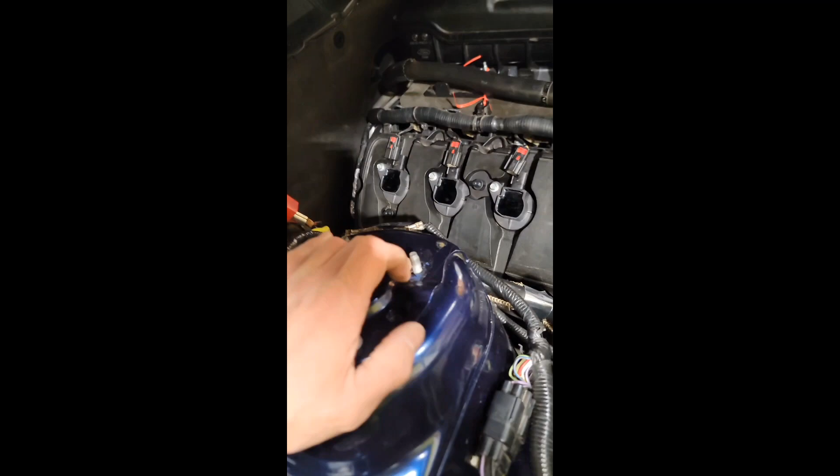So first of all, I am not sure if it is the valve cover gasket even. I know it's coming from this side of the valve cover. I already cleaned up all the oil and stuff, so there's no point in even trying to show you. But what I did find is that I figured I would test the torque on all the bolts for the valve cover, and none of them were torqued down to spec.

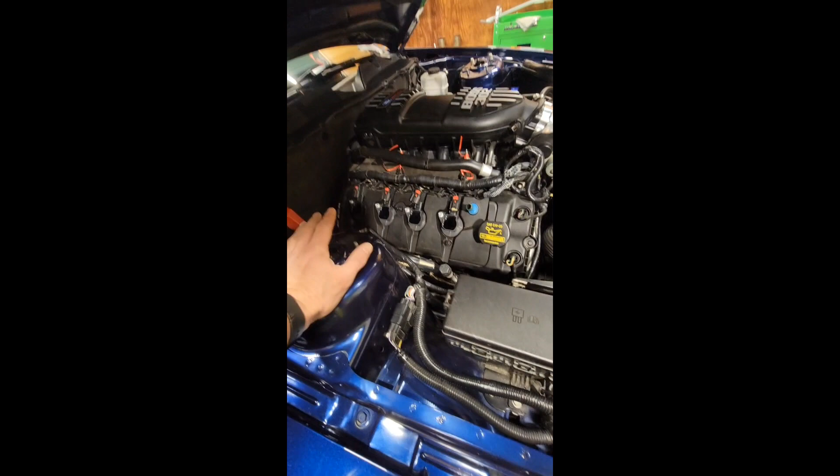There was a couple up here. There was like this one, and I think this one was tight enough, but the rest were pretty loose. So I don't know if over time they had come loose. I heard other people talk about that too. So I figured I would just make this video before I start tearing into it and mention that all the bolts were loose and I had to tighten them. And it was coming from back here too.

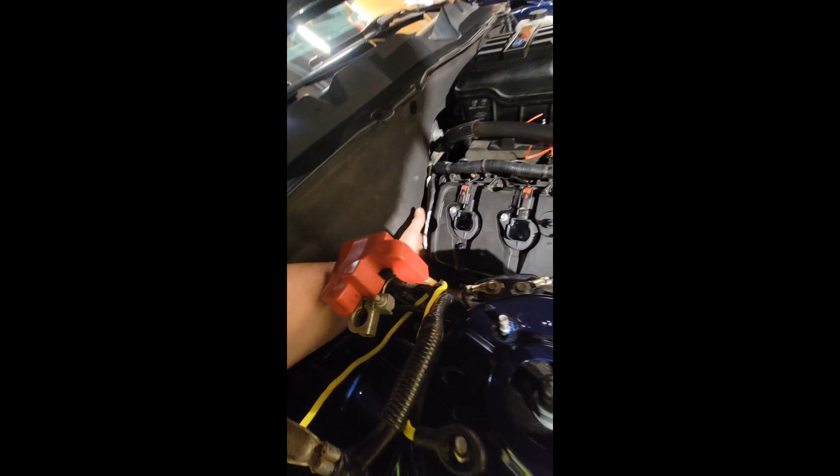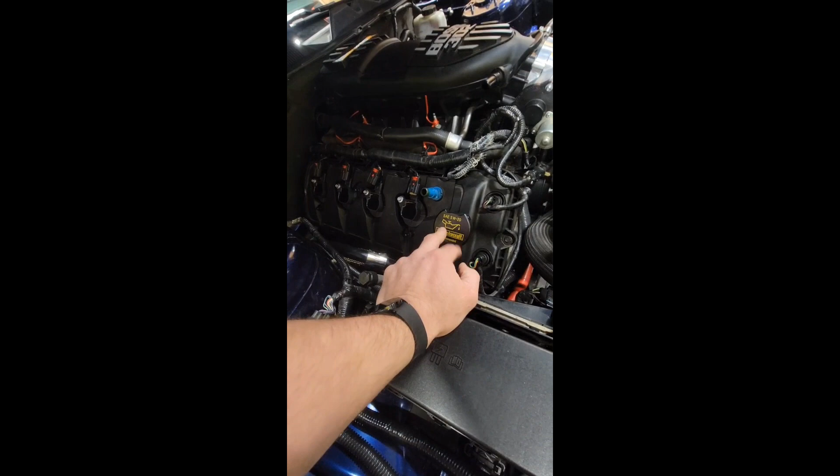So I don't know if anybody else is going through that, but I'm pretty sure that it's happening on my car because I have a catch can, but I took my cats off the other day, and I think I need to get a one-way breather for the oil cap, because I do have a supercharger kit that I'm going to be putting on here. It's a Roush Stage 2.

So I was kind of looking into that already, and what they were describing was that when your exhaust starts to backfire, it puts a lot of pressure back into the motor. So I get a shitload of backfires with my catless X pipe. So anyway, I figured I'd show you what's going on.

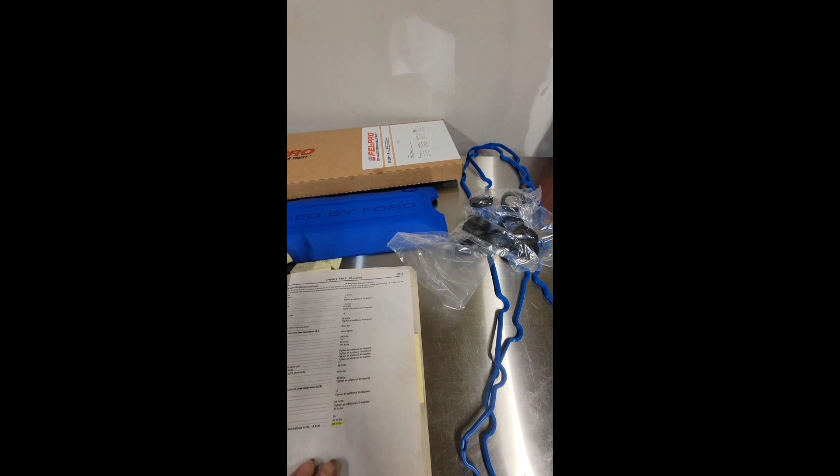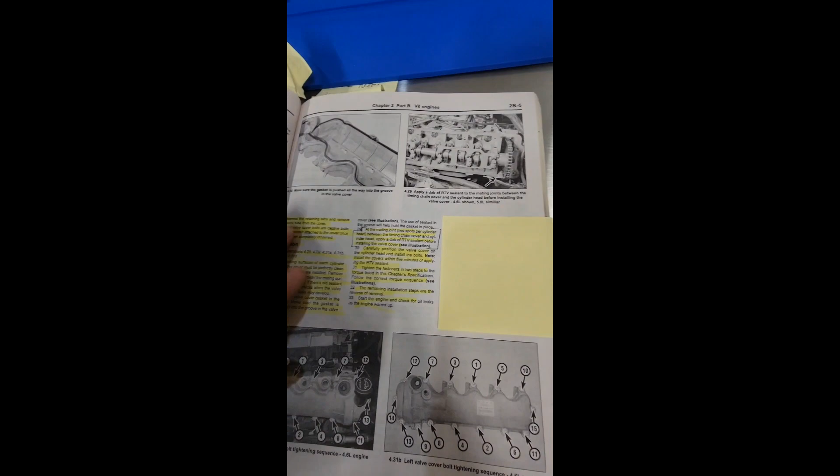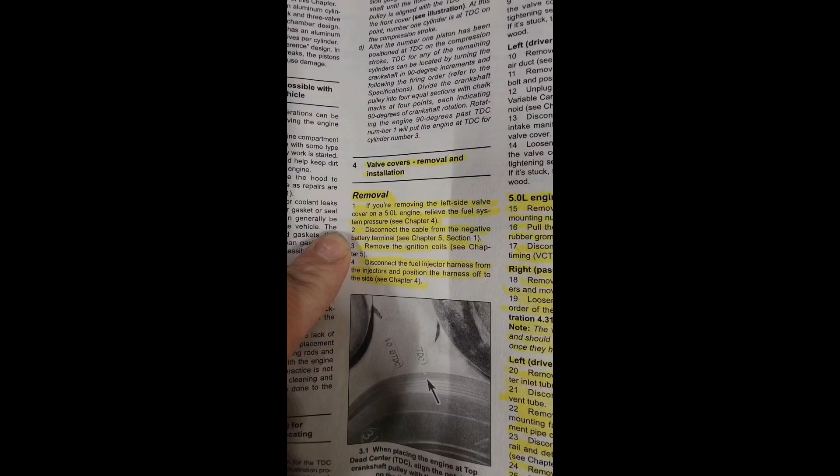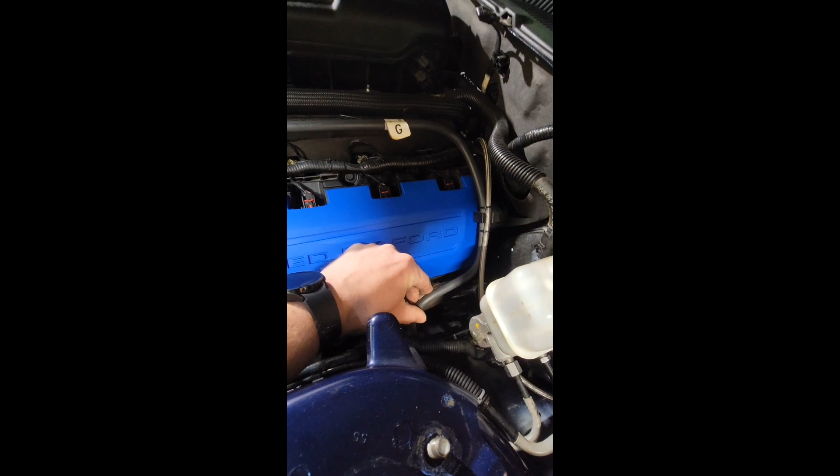So in the manual, the torque specs for the valve cover bolts are 89 inch-pounds in sequence. So just remember that, and then I'll show you this, and you can screenshot that stuff if you want about the removal. It says in here that you have to relieve the fuel pressure, but when I was looking at it, I didn't really see any reason to do that besides maybe that this fuel line's in the way. But if you want to fight that and not have to let the fuel pressure off, I don't really see a problem if you're just careful. You do have to take your air box out though. Probably take the dipstick out.

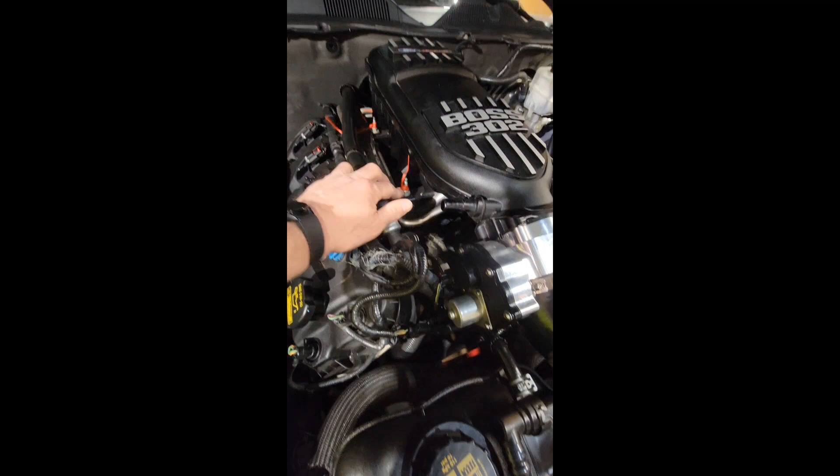It said also to disconnect the injector plugs, but I don't really see the point of that either. When you pull your harness off of the fasteners here, I would just use a plastic pry bar or trim tool, and what I did over here, I just tied mine up to my intake bolt here just to keep it out of the way for you. But yeah, I think that would be a pretty easy job.

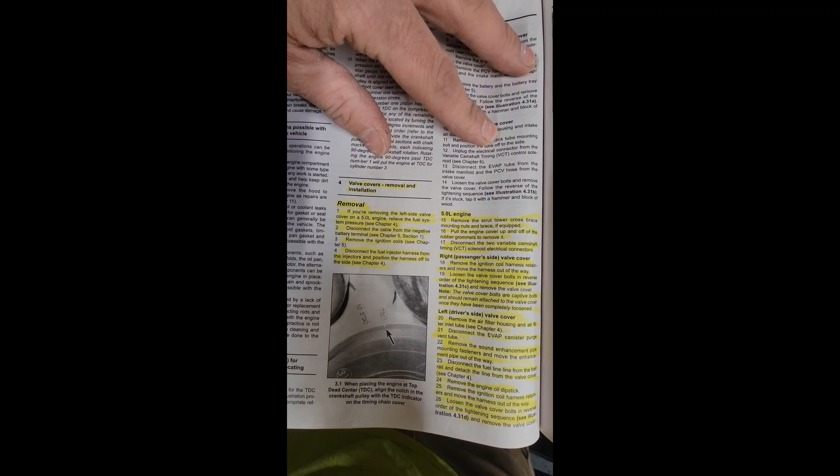I think I'm still going to do it, but I'm going to run this without that gasket on there and just see if that was the case or not. I'm going to run it for a little bit. Here is this information I'll show you in order here. So here's this page. You can screenshot that. Okay, I have all the 5.0 stuff highlighted. Here's the next page. Don't even worry about this right here. This is for the 4.6.

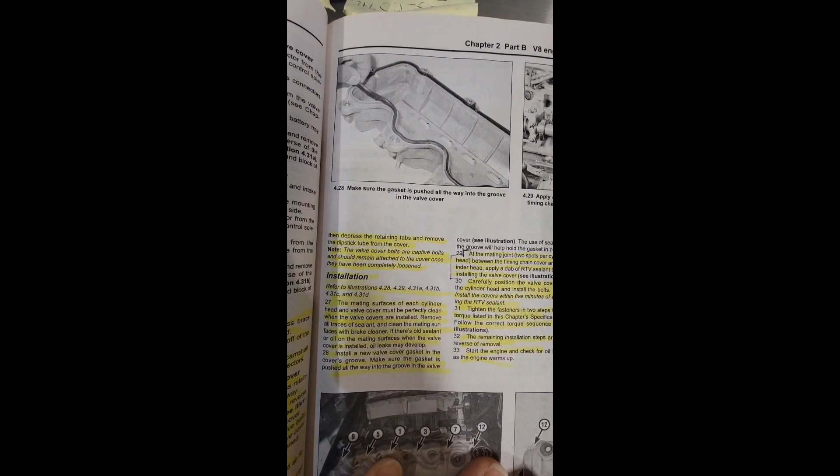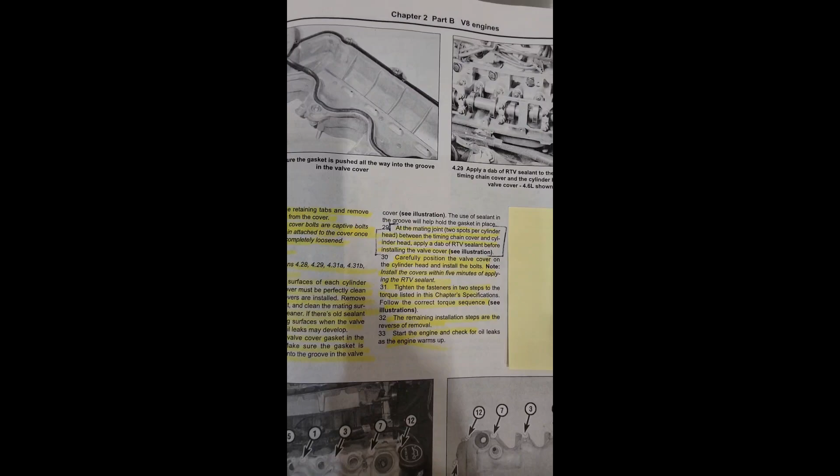So there's that. And another thing you want to make sure you do... Honestly, the only reason I'm not doing this tonight is because my RTV sealant was all dried up, so I couldn't do it even if I wanted to. I think you'd probably want to use the Ultra Grey, but maybe even the red, but Ultra Grey is what I was going to use. So there's that, and then here's the sequences right here.

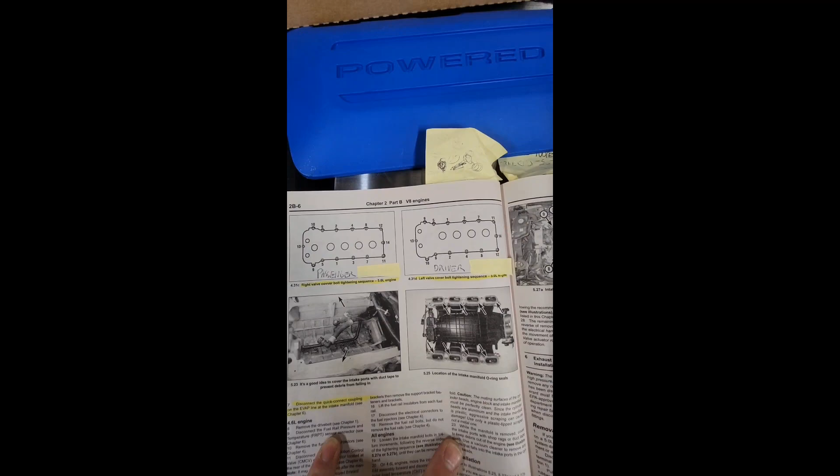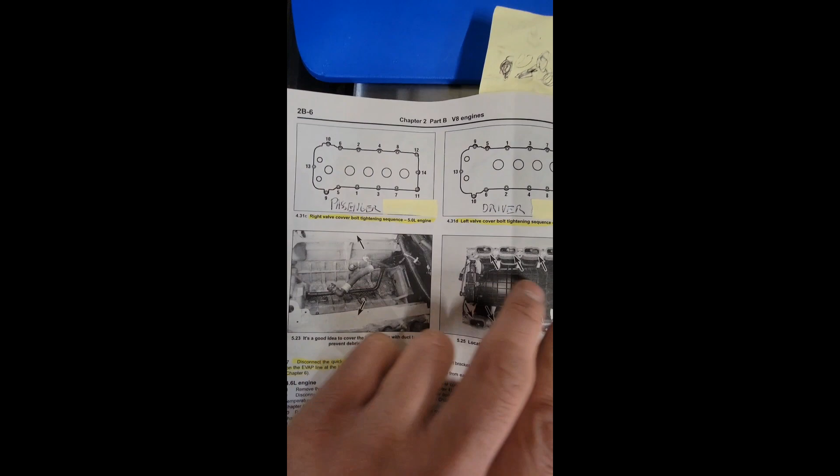And then here's another thing. Actually, don't disregard that. That's for the intake manifold. So here's your sequences right there. Passenger side, which is the right side. They call it the right side in the manual. And the left side's the driver's side, obviously. So there's that for you. And here are the gaskets. I think these are the plug gaskets.

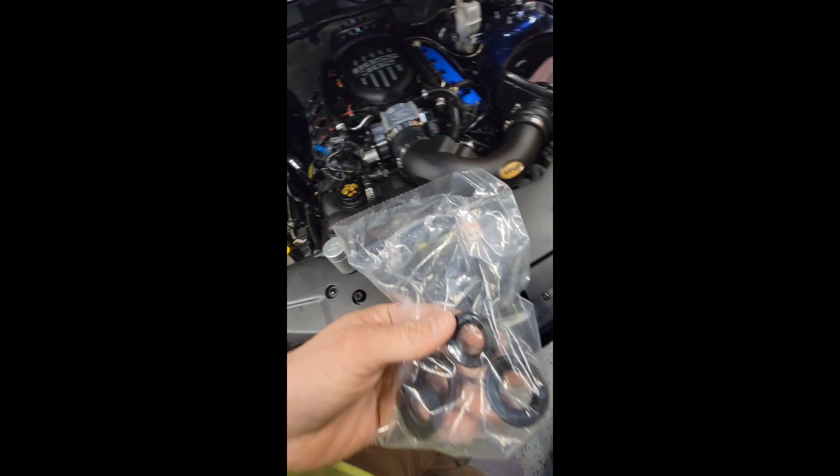Probably the phaser seal, or the phaser plug grommets, which would be these right here. These, yeah, 4 of them. So that's kind of what it looks like to me. And then I think that these are the bolt grommets. This is a Fel-Pro gasket. Here's the part number. I got this at O'Reilly's. They wanted like 120 for it, but AutoZone had it for cheaper, and they price matched it for me.

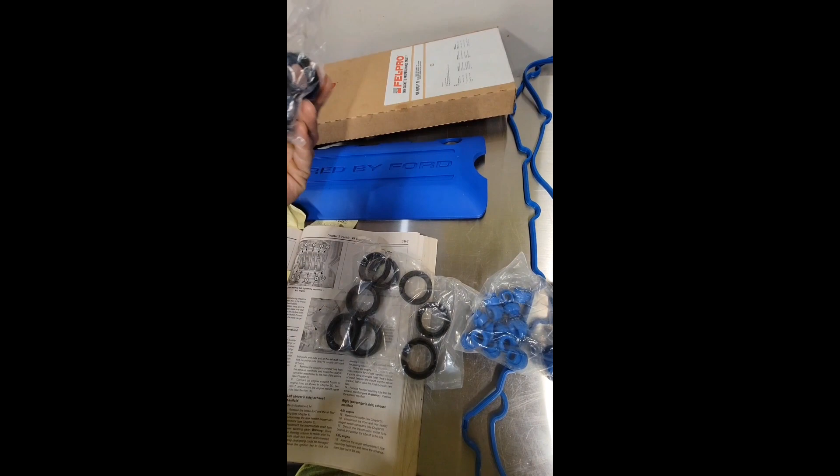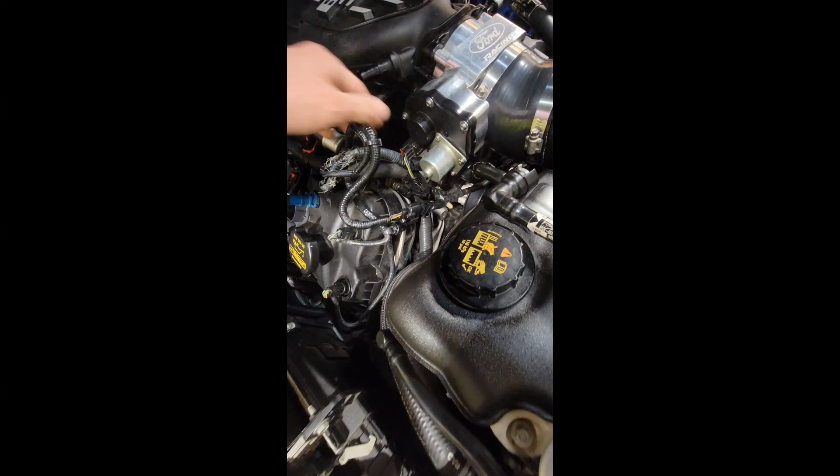And here's the gasket. According to Fel-Pro, on these spots right here at these tabs, that's where you want to add the RTV sealant. And then also, I want to say up here on top of the head that joins the timing cover, like right here on this spot, obviously where your gasket is, but I don't know if you can see this right here. This is what I'm pointing to. So yeah, anything that's kind of uneven, that's where you want to put your RTV sealant.

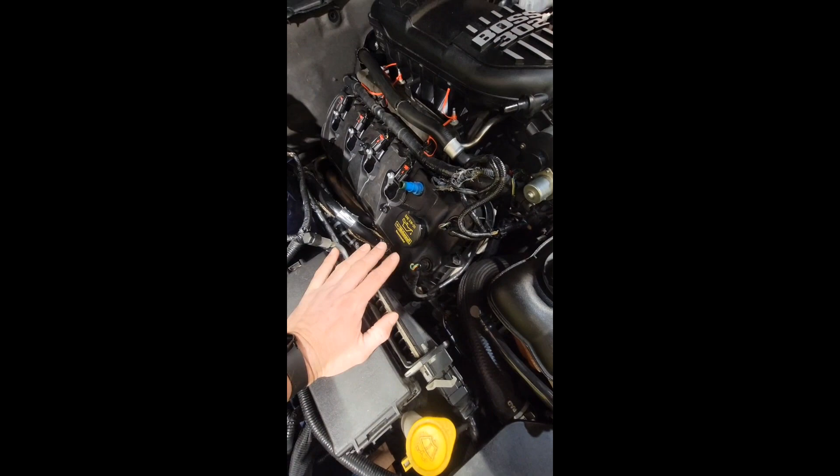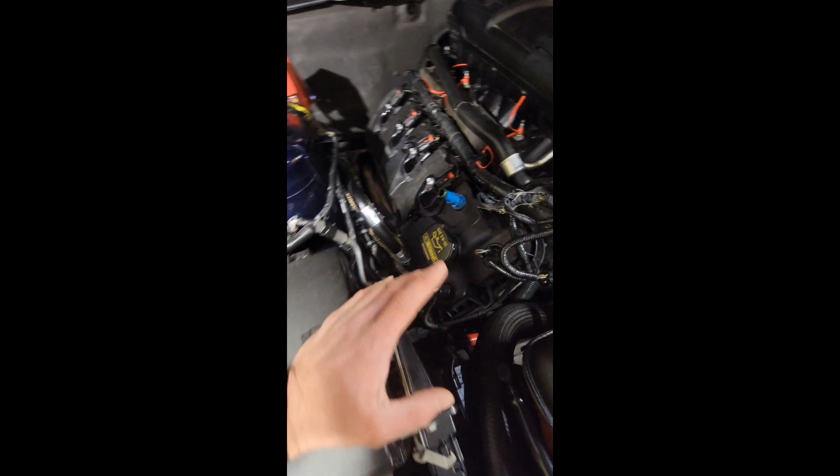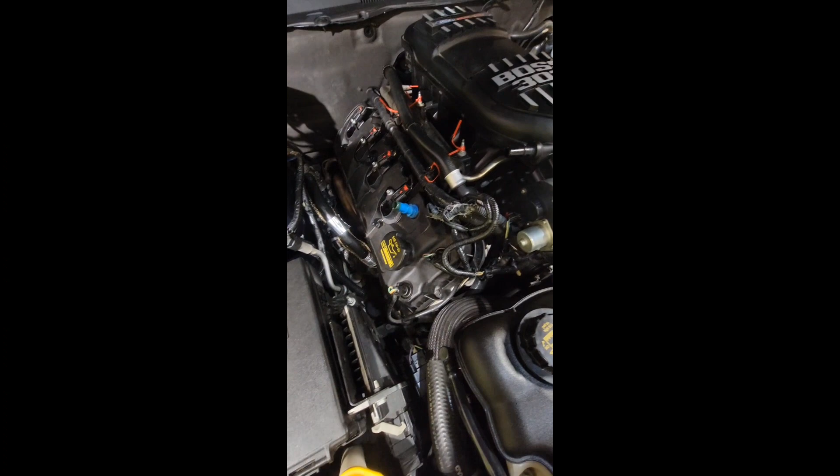But I definitely really believe that I should have a breather right here. I know that people say you don't need it, just NA, but I think maybe with the exhaust and everything, it might be putting a lot of pressure in here, because I have random grease and stuff popping up, and it was leaking really bad back there, and it just started after I took those cats off. So I think that's kind of what's going on. It would make sense to me, but I don't know. But yeah, so hopefully this helps.